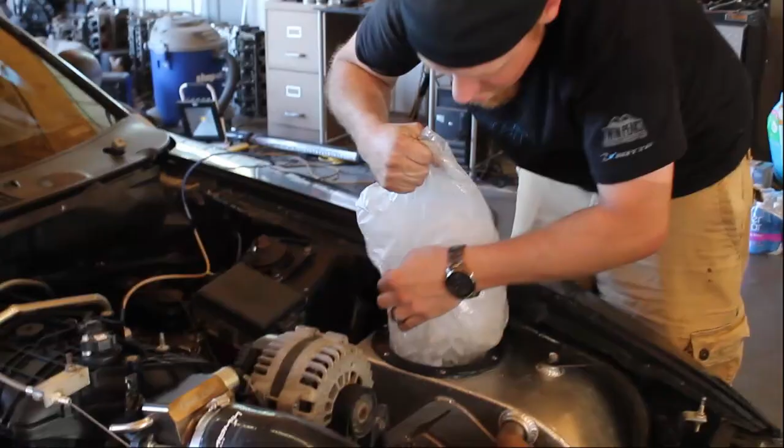Welcome to J&D Performance, same place I went to Dyno before in a previous video. I made 976, and today we're going to try to crack 1,000, which ain't a big jump, but that's just my goal.

The only difference between then and now is I went from the 88-103 to the 92-110 VS Racing turbo, and I went from the Tooley Stage 2 to a big custom grind cam that's really made for like a 400-inch motor, but it seems to really like RPM.

That's where I'm trying to make my motor live, in the high RPM. But anyways, we're gonna put Tyler's car on there too. It's a black New Edge. I've done videos on it before. If you're interested in the combination, we go into it in detail in a previous video, I think the name is Stella, that's his car's name.

But anyways, we both had the same goal. We want to crack 1,000, get some data, see how they do, just have a good time. So we're going to test these VS Racing turbos out and see how jumpy they are or how not jumpy they are. But it ought to be a good time.

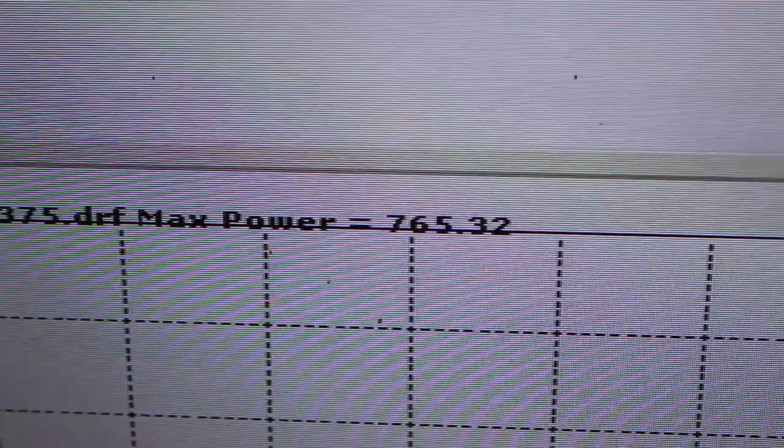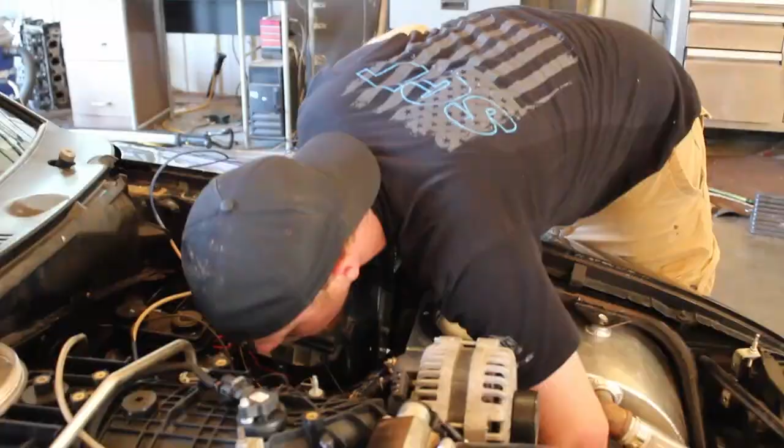Hey Tyler, how'd the first run go, bro? Still together. What was that, 16 pounds? 16 or 17, and 765. With probably not that much heat in it, right? Not much timing or nothing? 36, probably 18 degrees on 17 pounds. Dude, we know we're on the right track. That's some good numbers for the first pull. It hasn't blown up yet.

Hey, last time my car was on the dyno, it took us how much boost to get there? It was like 18 or 19 pounds, wasn't it? Yours made 750 on 20. Yeah, it was 750 on 19. I knew it was getting up there close to 20. So, hey man, was that with ice water? No, that was with dyno water. We're gonna hold it off now.

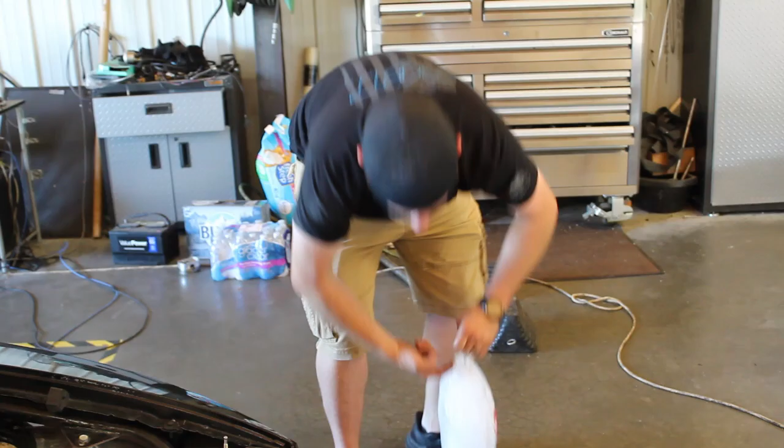That's awesome bro, where you set the controller to now? I make 25 pounds. Sweet, I'm trying to make 900 this pull. Right, how much, put some plugs in it, how much dome is that? Right now that was only 10 on the dome. It makes 8 without any, so it's still 1 to 1. So how much you put on the gate now? I'm gonna put up to 15 or 16. Okay sweet, I'm excited bro.

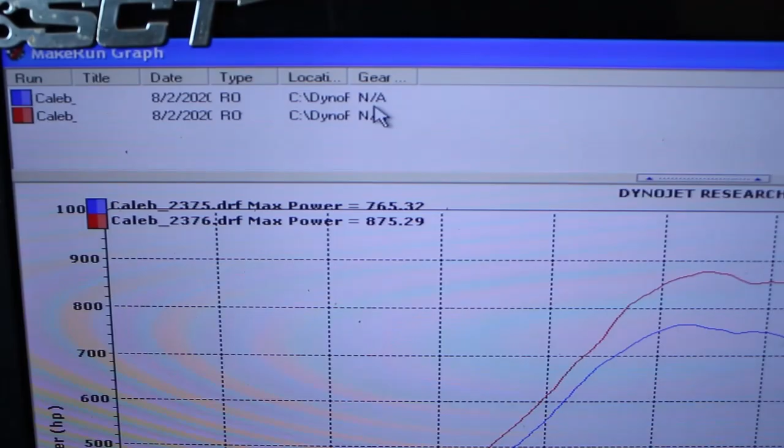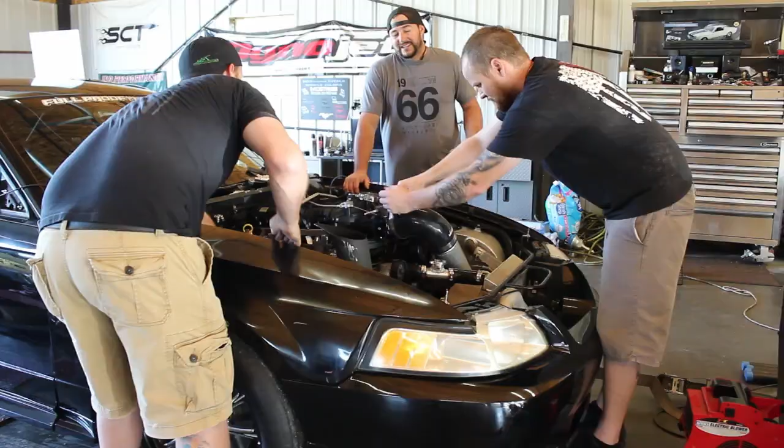What do you think, 875? I'll tell you real quick, 22 pounds, 875. Are you happy with that? So far, I want to make 1,000 on 28. Ain't gonna happen, with a lot of sparking though.

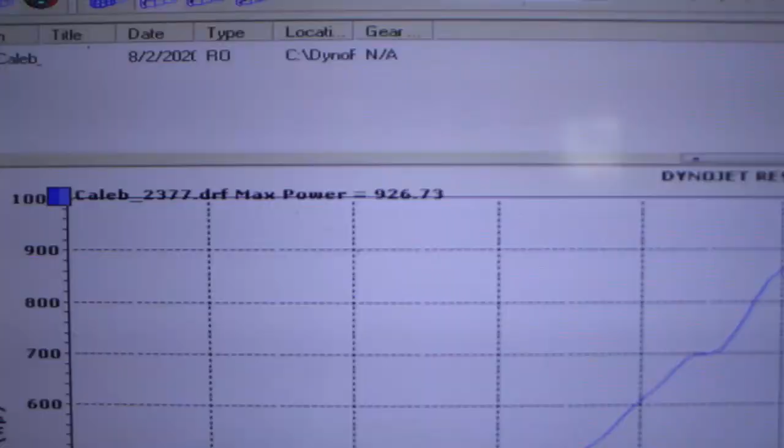Hey, your belt came off, bro. Yeah, your belt came off. Remember, you got no water pump. 208. 28 pounds, you say? So 28 pounds made 926 on 10 degrees.

Okay, 10 degrees peak or what? 10 degrees at peak torque, ramped into like 13 or 14. Gotcha, and that's just tire moving around. I'm gonna go hit the ice. That was also a hot pull, we started at 71 degrees.

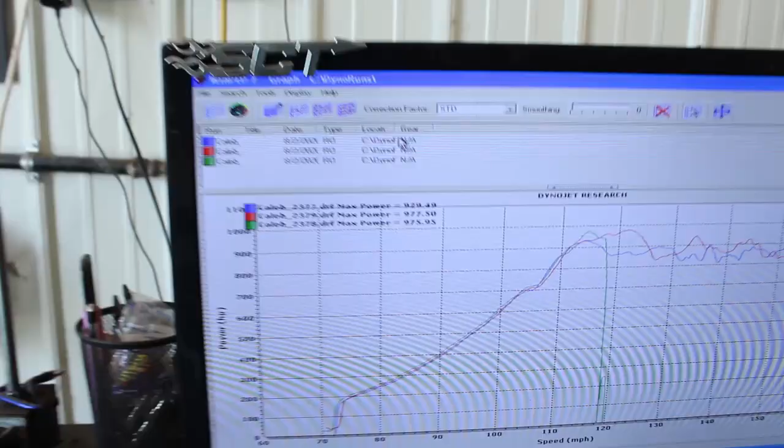That was 30 pounds, and I'm losing fuel pressure. Is that what we thought was gonna happen, wasn't it? Fuel pumps were gonna be our limit. Yep, dude it sounds so good. Hey, it's on a deadhead still. Is it, deadhead fuel system? Yeah, that's true, yeah I forgot about that.

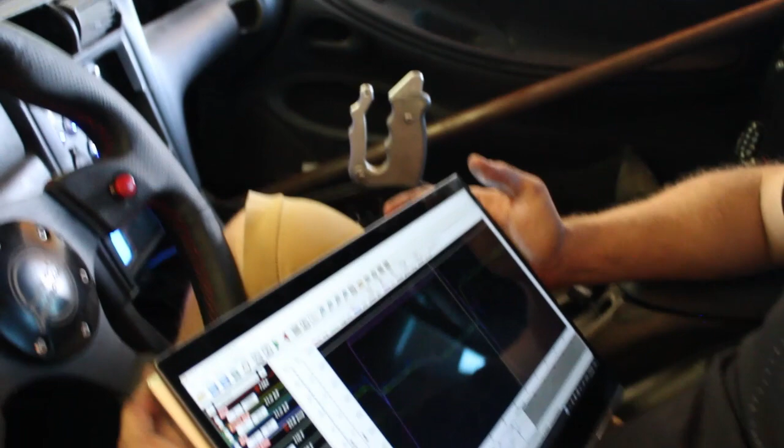Did it go lean on you? No. It's running, it's got plenty of fuel, but duty cycle is going to jump up. Yeah. 88% duty cycle with ID2000. Yeah, it's out of fuel. Yeah, it's out of fuel. Alright, I'm done.

We just got done running Tyler's car. He did extremely good, we were really impressed, and we had high hopes for what my car was going to do. His car was first in line, mine was right after his. First whack on the sucker, like 17 pounds, made mid 700s. That's really good numbers in my opinion. And then it just went up from there, picking up good horsepower per pound, and then he just ran out of fuel. That was kind of our worry from the beginning, that his fuel system was his limit. But it is what it is. If you put some race gas in there like what I did, he can push it harder, obviously it'll hold more, the motor's very happy. Yeah, it was a good day for him, and he got some really good data.

Duty cycle was super low, fuel pressure was great, everything was great, but the tune-up was definitely different. It definitely wanted a lot different numbers than it did on regular E85, but it seemed to like it, and it made power. You could tell the harder and harder we pushed it, the crisper the car sounded, the less it smoked. It just sounded better.

The plugs are brand new, let's pull them so we can see. All the plugs look super wet with fuel.

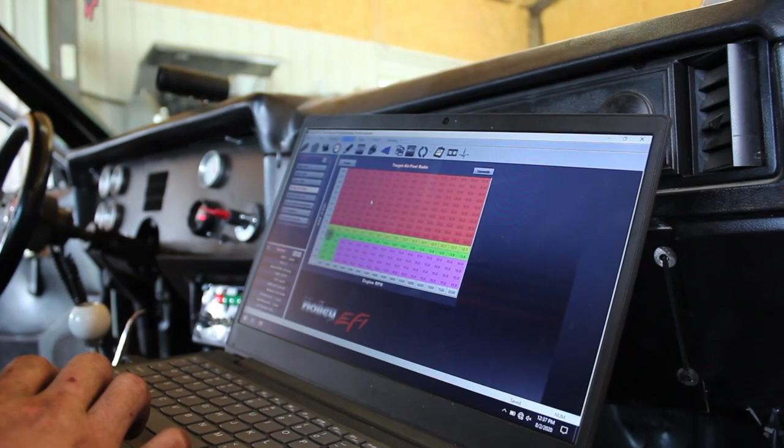I was commanding 11.7 at 30 pounds. I leaned it out to 12.0 commanding, and I transferred the learn table, so I'm gonna see what it does. I don't really know what else to do, the plugs say it's running rich. You want to keep these? Nah, I'll just throw them away. Plugs say it's running rich, so it's running rich. So we're gonna keep pulling fuel, even though it doesn't make sense to run this lean, but it does have a race gas mix in it, and race gas typically wants a little leaner AFRs. We'll see what it does. I didn't make any other changes, just put a fresh set of plugs in it.

If you guys are wondering what the turkey fan is for, it's because my motor's a worn out piece of shit and it was pissing oil everywhere.

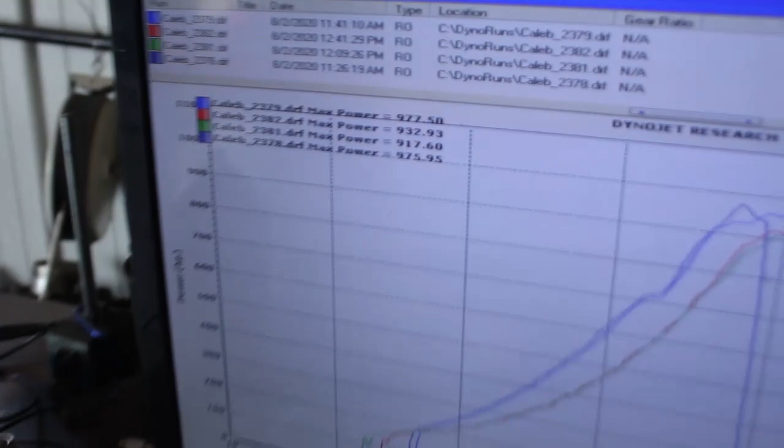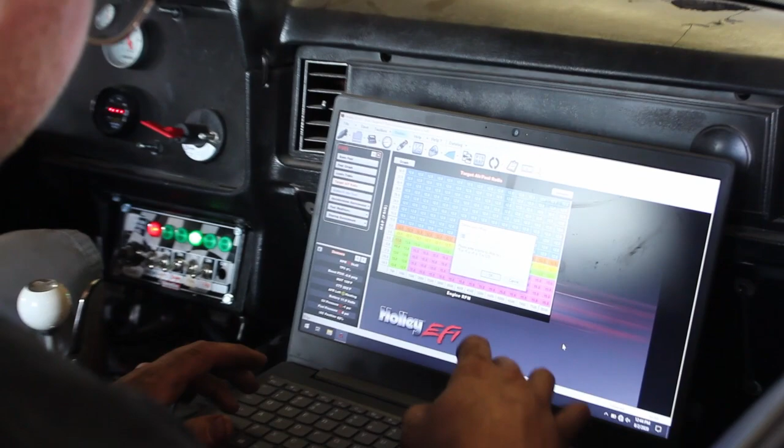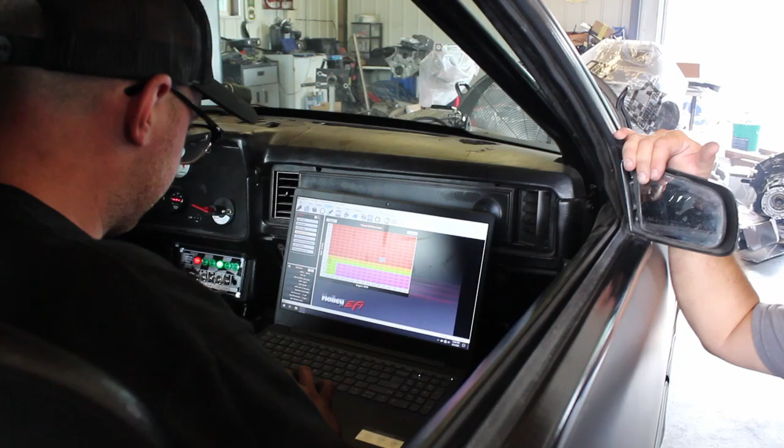It's okay, we're headed in the right direction, that's what matters, you know? It sounded a lot happier either way. That's the only reason I did it. It only has a little bit of adjustment, I only get it like 5% where it can adjust.

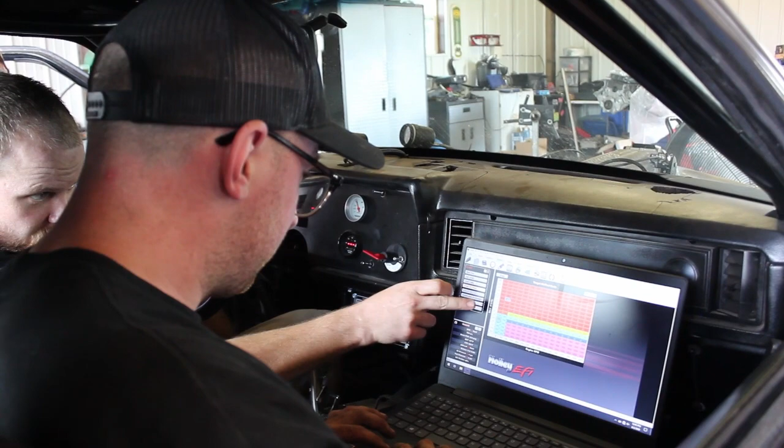Pulling in boost, since we're wide open throttle up here, we don't need to go from 12.9 and then add a bunch of fuel and stuff. What do you want to do? Gradually? Yeah, 13.3.

I always do one at a time. Or that. What do you want? Yeah, don't do that. We don't want 1390.

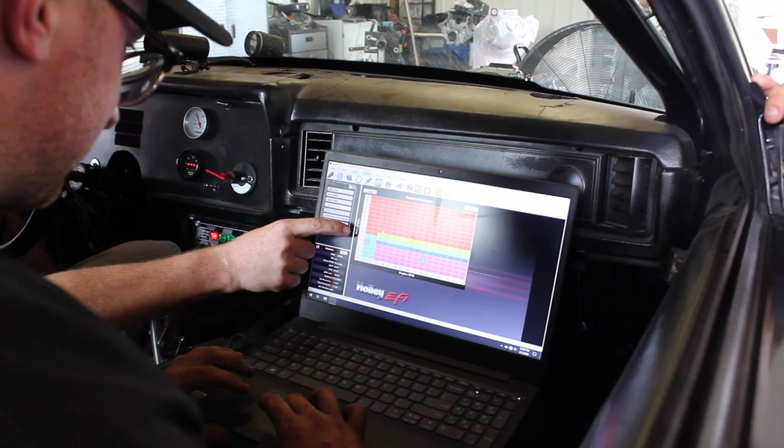Do 1250 on 6. We're on race fuel, so it's gonna want more, it's gonna want to be leaner. So 12.5 here. 12.5. There, and then blend those in smooth.

Like that? Or down? No, because you're gonna add a bunch. Well, you can try it, but I think it's gonna add a bunch. There you go.

I like having a mouse, I can't operate that finger thing. Like that? Or is that still shitty? That's better.

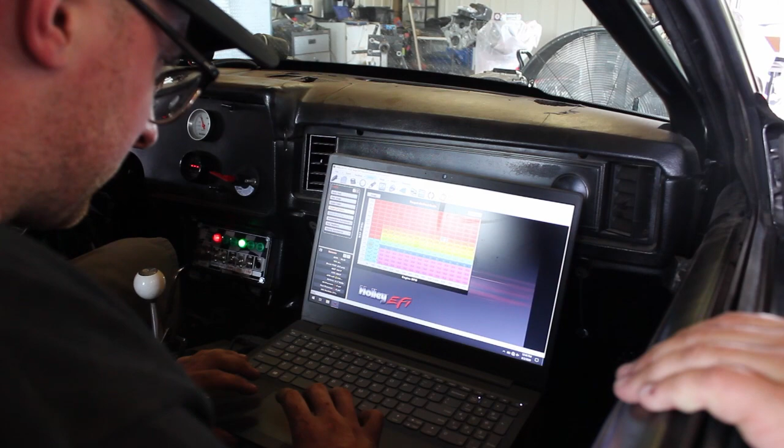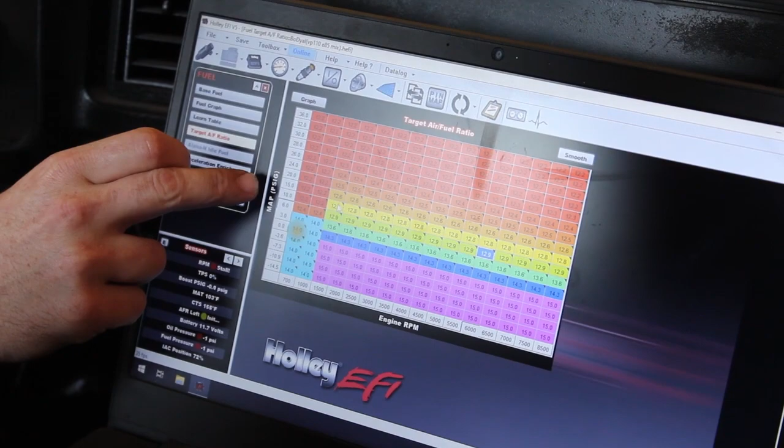There you go. But add, say at 15, just add a skosh there. What do you want?

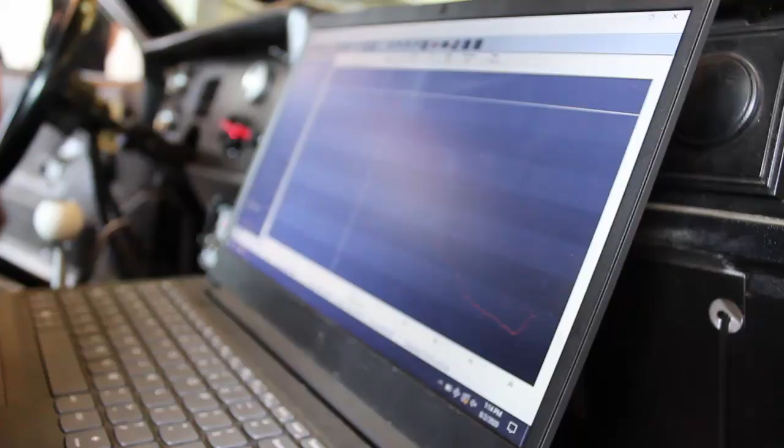I'm looking over the log to see if it actually ran the AFR that I wanted. Oh, it was low 12s the whole time. Coolant pressure never spiked, so. Is it what gas you got on it?

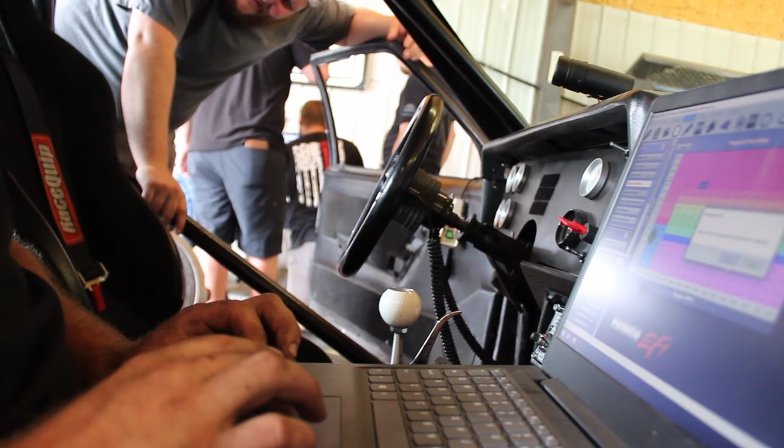LS1? That's awesome, the 3-layer. New studs, right? Yeah, Chinese studs. When I put this motor together, I wasn't expecting to put a big turbo on it.

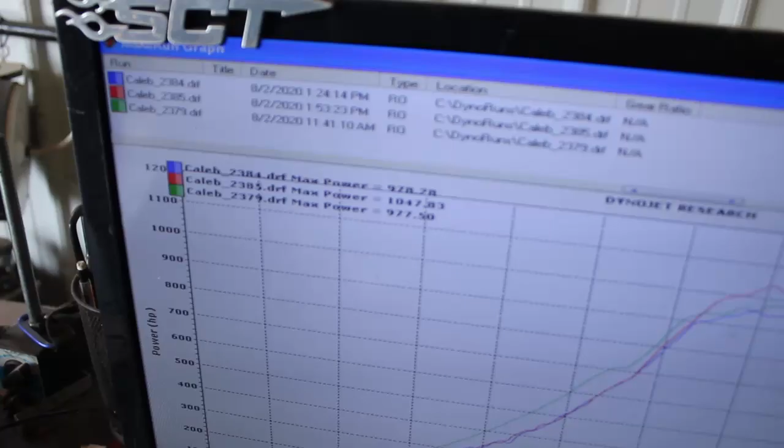So I couldn't be happier with the way my car performed. I thought it was awesome. I was extremely happy, and I mean, I was just tickled to death.

Going in there that day, first whack, it made like low 900s on 30 pounds. I was immediately like, well, boys, I think we're done here. We're gonna load it up. I must have hurt it.

I leaned it out when my alternator took a crap on regular E85. I had to have hurt it, because there's no reason it should be down that much power. But we went ahead and pulled plugs, and they were soaked with fuel. Like, well, that's weird.

As you can tell from the video, we just kept leaning it out until it stopped picking up power, and then we put a little bit back in, and it was extremely happy. Then we just started putting timing to it and boost to it, and all of a sudden it came alive and made a number, and we were extremely happy with it.

Honestly, I didn't really think much of it until I posted my results online, and then everyone's like, yeah, that's the limit of the turbo, it'll only make 11 something. That's why I took so much dome, which I don't think I explained this to you guys.

My car made 30 pounds of boost on 30 pounds of dome. It took 60 pounds of dome to make 8 more pounds, so 60 pounds of dome to make 38 pounds. And I made an 1131. Okay, I'm happy with the power number.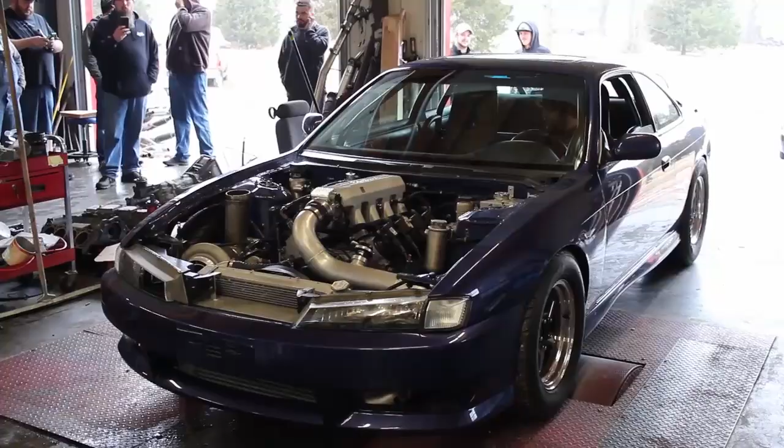That thing's got a way smaller exhaust wheel - it's just a smaller turbo. You would think a 92 110, that thing's a monster, it should be able to make the same power on less boost, but obviously the design just ain't up to par.

But like I said, I ain't upset. I'm glad we got the data and I'm happy with it, and I'm probably not going to change the turbo for a long time. I'm not going to need over 1100 for a while. Whenever I put together a built motor or something, then I'll start looking for a GT55 or something along those lines. But yeah, it was a good day all in all, and we got some good data, and it was fun.